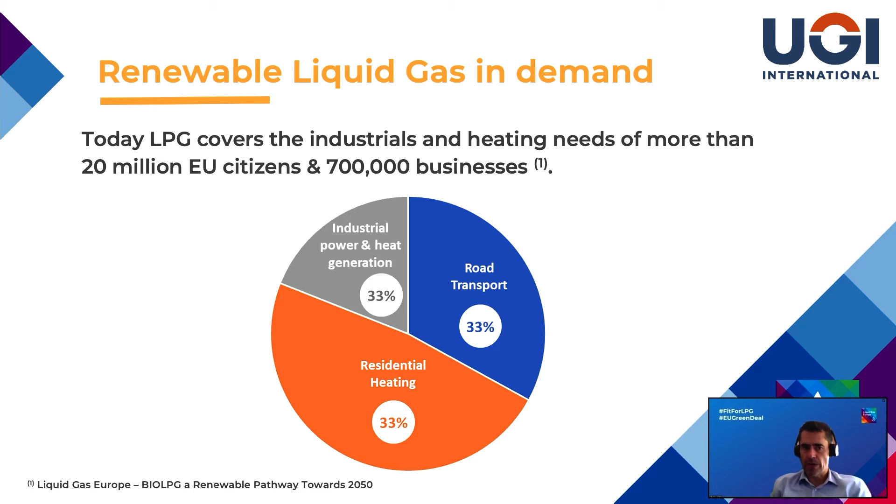In terms of technical pathway, to reach our 2030 goals and beyond, we have developed an innovative roadmap built on a mix of technologies. There is not only one. Some of them are available today and capable of co-producing LPG.

For the next step, we are focusing on in-development technology to produce on-purpose liquid gas. We are also intensifying our focus on research and development and external partnership. Our pathway will be an iterative process where we constantly search for new innovative and efficient ways of producing renewable liquid gas. This is the most appropriate way for us to innovate and make our future sustainable.

The future is a smart combination of technology, partnership, and feedstock availability. As we are targeting carbon neutrality, we have to use what is available annually. It is simply what nature produces over a year and qualified as biomass.

One of the most abundant components in biomass is sugar. This is what photosynthesis produces using water from the soil, CO2 from the atmosphere, and the sun's rays. The fermentation of sugar produces alcohol, and given the limits of the HVO process linked to the ban of palm oil or the limitation of used cooking oil, it's obvious for us to focus our work on the conversion of alcohol into hydrocarbons.

We can use different feedstock, but we target advanced material in the sense of the European regulation, especially RED II and Annex IX. That is to say, essentially, what is not in competition with food or something that will introduce change in land use.

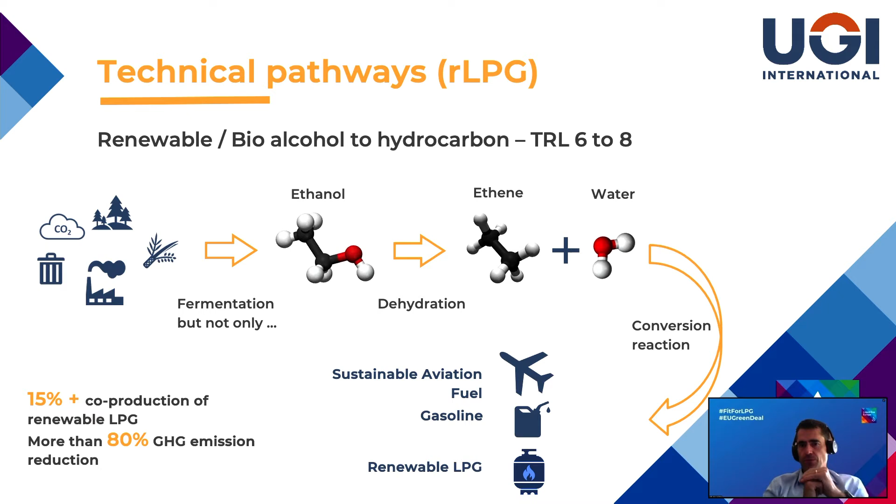Among the other pathways, the most mature one I would like to mention is renewable dimethyl ether, RDME, produced from organic matter. It's a sustainable liquid gas with up to 85% lower greenhouse gas emission compared to fossil alternatives. RDME can be produced from sustainable feedstocks such as waste and residue using gasification and catalytic synthesis. Being a safe, cost-effective, and clean-burning fuel, RDME is a viable and sustainable addition to the energy mix.

RDME is chemically similar to LPG, and in both pure and blended form, RDME can help decarbonization by becoming a sustainable alternative for off-grid energy uses, including heating, cooking, and transport, just like the existing uses of LPG.

Together with industry partners, we announced earlier this year our ambition to promote RDME, and we are investing in the development of 6 production plants within the next 5 years, targeting a total production capacity of 300,000 tons per year in 2027. Our ambition with SHV Energy is to build a joint venture, and this joint venture will bring scale and critical mass to the RDME market by developing opportunities for investment in production capacity.

Moreover, it will promote the use of RDME by driving effort for market acceptance, developing new RDME-based technology to gain traction among users, and supporting the development of infrastructure, regulation, and standards for the safe use of RDME in the off-grid sector. This is really a great step forward where 2 leaders team up to innovate for the benefits of our entire industry.

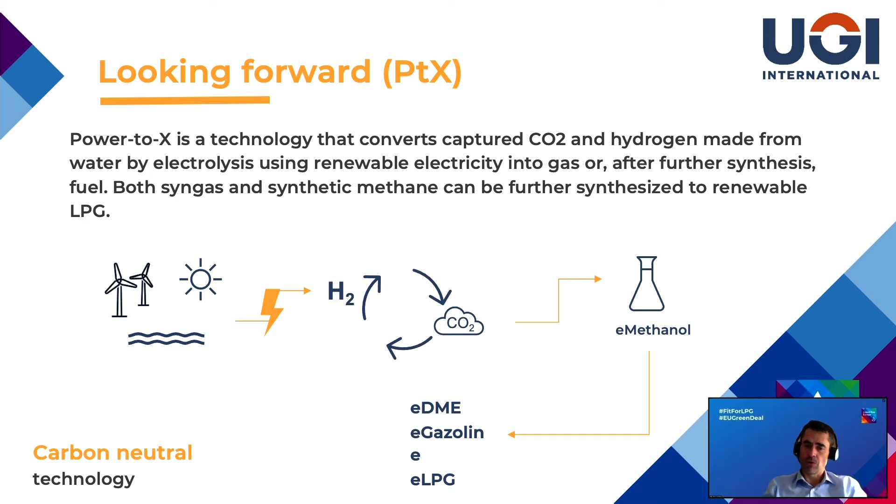What's next? To go further and look at the long term, we certainly have to think about our diversification with less carbonated molecules. The possibilities are multiple, but some of them have a particular fit with our industry DNA.

Let's imagine that we go from 3 and 4 carbon atoms to only 1. We now have a candidate, that is methanol. I mentioned it already. It represents an interest as an intermediate molecule, but also as a final energy.

The green methanol market is expected to grow strongly by 2030 in Europe. Experts predict that 54% of methanol in Europe will be bio-based or renewable by 2030, with a volume of over 500,000 tons per annum. Transport is expected to be the key driver. There is already interest across the whole value chain, with a wide range of players starting to invest, like producers, distributors, car manufacturers, shipping companies, energy companies.

Methanol to gasoline and DME production shows the immediate interest of methanol for industry. And in the longer term, it's being considered as a transportation fuel for fuel cell vehicles, marine transportation, and gas turbine power generation. Let's now substitute the remaining carbon atom by nitrogen.

We now have ammonia. Ammonia is currently used by a vast array of industries: fertilizer, chemical, mining, pulp and paper industry, and others. Green ammonia production is expected to reach 1 million tons per annum by 2030, and 22% of the total ammonia produced annually will be renewable.

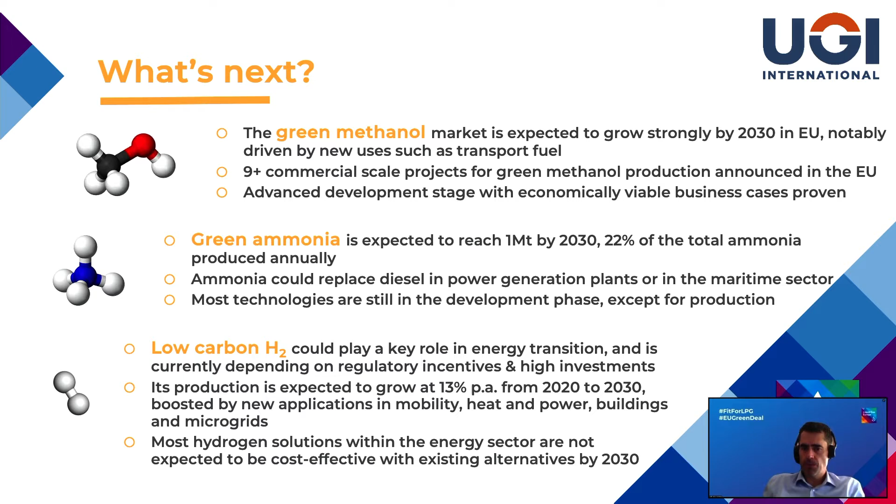And finally, just keep the hydrogen atoms. We now have a molecule that does not contain carbon anymore, and that will not produce greenhouse gas emissions at the exit of the exhaust pipe.

But what about the production of this hydrogen that is not yet completely decarbonized? Today, hydrogen mainly comes from fossil fuels such as natural gas, with an expected annual growth of 13% from 2020 to 2030 in production.

Renewable electricity should represent 20% of the total hydrogen produced in 2030. This will depend mainly on a decrease in the production cost of renewable electricity, but also on the cost of electrolysis, as commercial scale installations are being set up.

Green hydrogen projects are booming in areas where we have regulatory incentives and where renewable energy can be produced at low cost. Mobility is expected to represent nearly 50% of new usage of green hydrogen by 2030, but gas grid, building, and microgrid after 2030 could represent the main growth.

Finally, I would like to open some windows for different areas of innovation. Innovation, as you can see, is on its way. And for the future, there are many other areas where innovation is needed.

Propane and butane production has never been a refiner's primary objective. In our discussions with them, they clearly tell us that they try to reduce its production as much as possible. There is a need for our industry to promote and support the development of on-purpose propane and butane production processes.

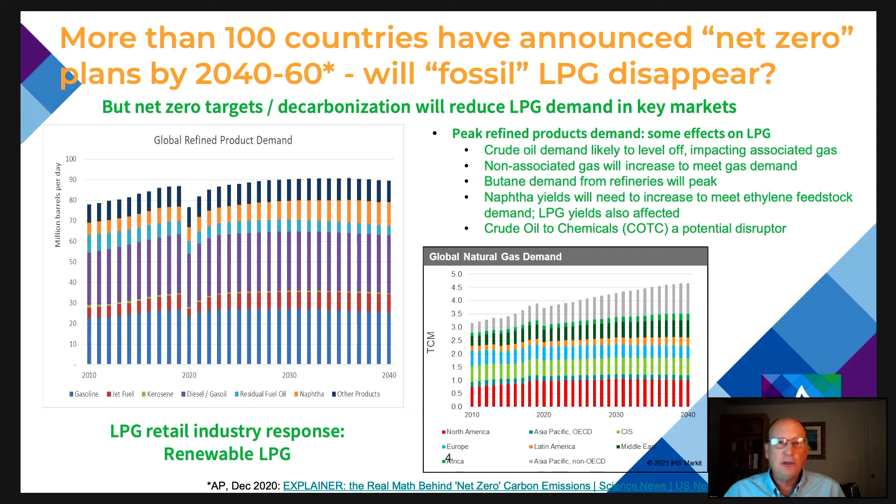Another potential disruptor is the trend toward producing chemicals directly in refineries—traditional refineries switching over for so-called crude oil to chemicals. That could very well produce a whole lot more fossil LPG as well. So we should expect to see large changes in traditional refining and gas production that's going to end up still producing a whole lot of LPG, and we should not see it decrease.

There's a couple of things to point out that are important. One is that you only get propane from the HVO process—you don't get any butane. So anything that's butane-specific from a demand standpoint is not going to be served by this HVO process. The second thing is that renewable diesel is different than biodiesel. Biodiesel is produced from transesterification, which has glycerin or glycerol as a side product, and it doesn't produce any LPG.

Third, different types of oils or lipids can affect the propane yield—the lengths of those side chains, for example, will have an impact on the LPG yield coming out of this. So there's no exact yield to state. Finally, you can also use what's known as tall oils or other fatty acids to feed the HVO process, and that won't produce any propane because they don't have that backbone that comes together. So there are limitations, and you need to watch this when looking at HVO and see what kinds of feedstocks are being used.

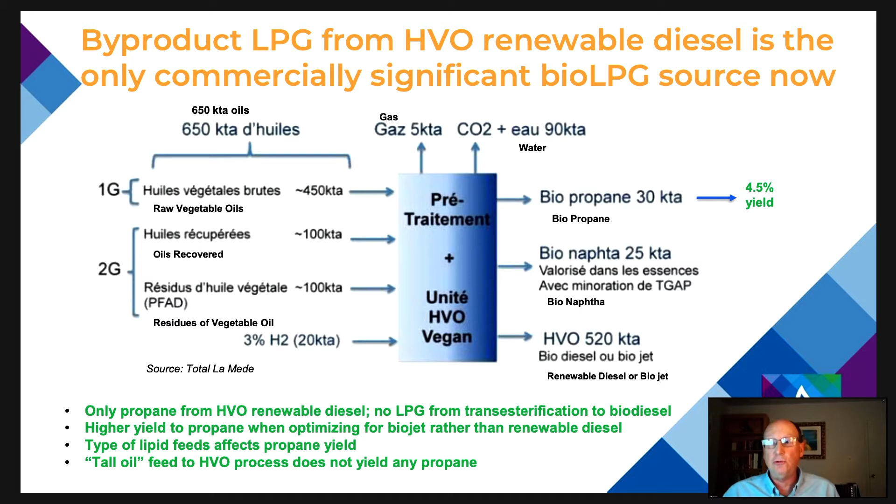If we can go to the next slide—we've seen that there are several renewable LPG pathways that are commonly referred to, and Cedric mentioned all of these. The first one on the left, power to X; biogas conversion in the middle, which is typically going to go through gas to liquids; and on the right-hand side, biomass to liquids. What these have in common is that they go through synthesis gas, or syngas, which is a mixture of carbon monoxide and hydrogen.

They all have their own individual challenges as well. If you look at power to X, Cedric mentioned this—first, where do you get your CO2? The second thing is that it's going to require a lot of hydrogen, and that hydrogen needs to come from sustainable sources. We're going to hear a lot more about hydrogen in one of the speeches ahead, and hopefully they'll talk about the different colors of hydrogen. But if you really want to be sustainable, it needs to be green hydrogen.

If we look at trying to make CO2 turn into other types of fuels, that is effectively thermodynamically uphill, and you're going to need a lot of energy input to bring that to fruition, and that's expensive.

When you look at biogas conversion, biogas is typically a mixture of methane and carbon dioxide, so there's a lot of carbon dioxide involved in that process. There are different types of biogas, and you're going to have to make a separation. It's not as clean as getting a lot of the methane that you might get from the gas grid.

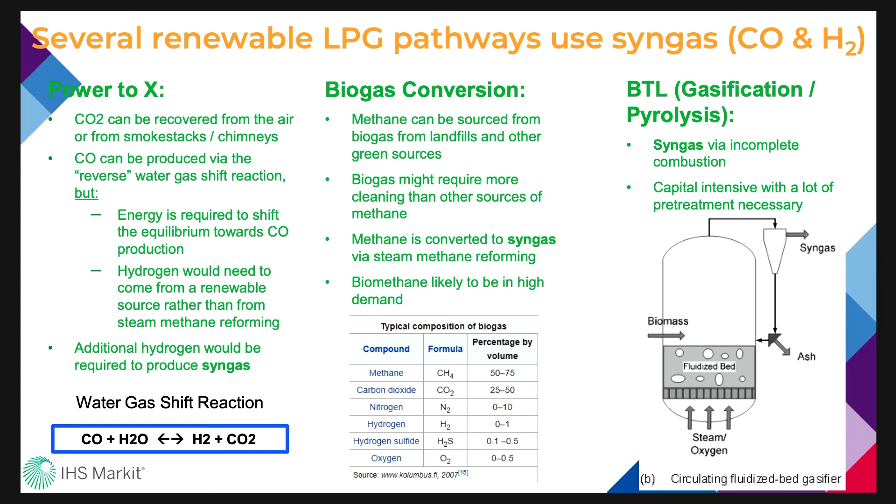So what is the issue with synthesis gas? Let's go to the next slide.

In this next slide you see synthesis gas, and on the left-hand side, what's really amazing about synthesis gas is that you can go to an amazing array of different types of chemicals from it. When you look at the process that goes through alkanes, typically they're optimizing on diesel and gasoline. Indeed, if you look at Sasol and Shell, you're looking at maybe a 1% or less yield typically, because they're trying to emphasize middle distillates, gasoline, things like that.

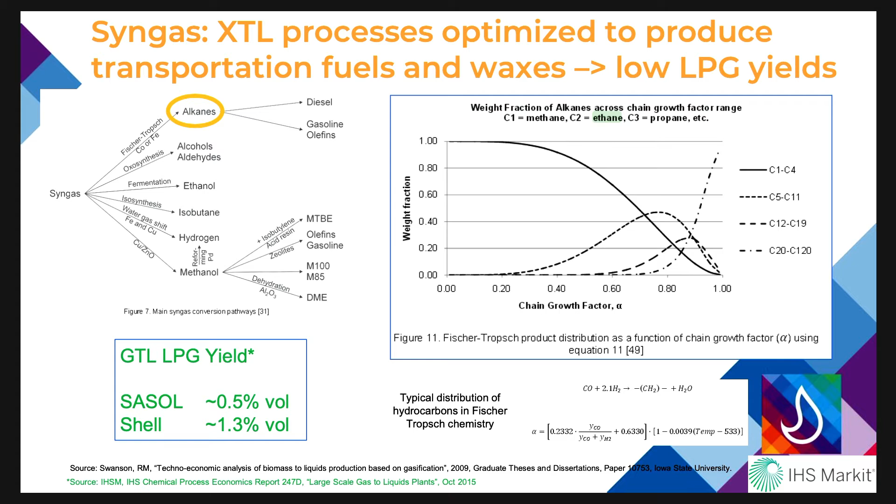Can you shift the optimization? Absolutely, you can change those operating conditions. I won't go into the details of this, but you shouldn't expect them to, and that's really for financial reasons. I'll talk just a little bit more about that on other slides, but anything that goes through synthesis gas is unlikely to produce a high yield of LPG because other products are going to be more cost effective to produce. Next slide, please.

You also heard Cedric talk about production starting with ethanol. I won't go into a lot of detail, but first off, you don't have to start with just ethanol—you can use other types of alcohols for this. But what's important to understand is that, in Cedric's graphic, it goes through ethylene.

So ethylene is also something that people are going to want to produce in sustainable and bio-effective ways. And ethylene traditionally has been more expensive than LPG. So if you're going to go through an alkene like ethylene, it's going to be more valuable than LPG, so it's not going to make a lot of sense to be producing LPG if you have alkenes as an intermediate.

Consequently, there's been a lot of research to optimize the middle part of this, the oligomerization, where you go from ethylene and other alkenes to longer chains, to optimize on those middle distillates and produce very little of the short chains. It doesn't mean you can't do it, but if you do, you're giving up a lot of the value that you potentially could have.

You can see on the bullet on the right-hand side that there are certainly processes out there that can really minimize the amount of LPG that's produced. You should expect that that's the way most of these processes are going to go, and that LPG production is going to be small.

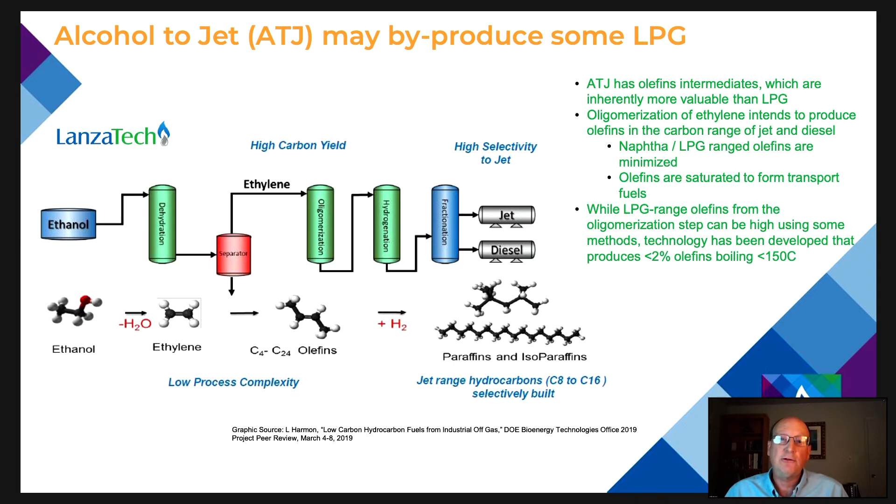Next slide, please. This next slide is from a company called GEVO. It's not an endorsement by IHS, but I just thought it had a good indication in their investor presentation from March.

With the little blue arrows, I'm pointing out a few things. One thing Cedric mentioned is that customers want products to be drop-ins, so they can use existing infrastructure. The second thing is that customers want products at a price near parity with fossil fuels, especially when trying to convert processes over.

So there's a lot of price pressure on these biofuels companies to keep costs low. The last arrow here is that GEVO is trying to share their carbon value to make products more affordable for customers and still eke out a return for their own company. There's a lot of margin pressure on this. You can see here, they build the molecules that capture the most value.

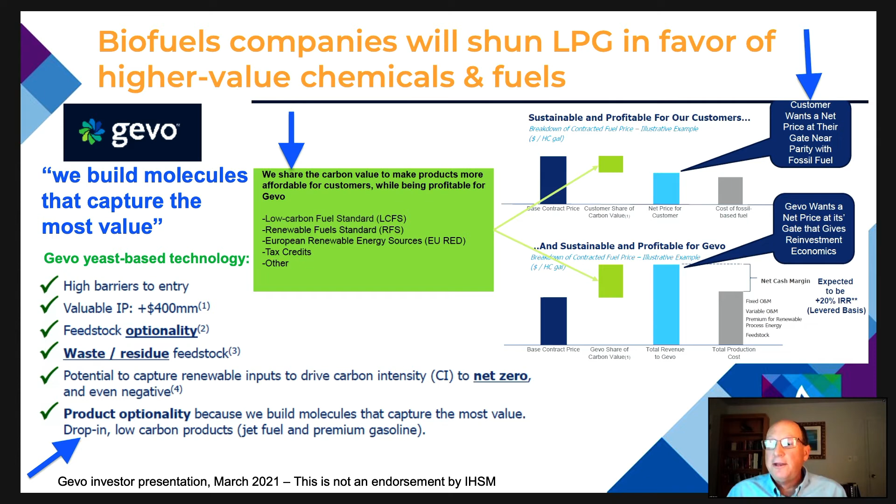Most of the time, that's not going to be LPG. So on the next slide, the implication of this is that an economical, on-purpose renewable LPG process would be quite a disruptive technology. In all the cases we've seen, it's a byproduct, just like fossil LPG is today. And the qualities that make LPG attractive as a petroleum byproduct—cheap and plentiful—make it unattractive to make on purpose. So what are the criteria we need?

You need a bio or sustainable feedstock that's cheaper than the bio LPG being produced, and that cuts out a lot of options, a lot of pathways. The feedstock would need to be in sufficient supply—plentiful enough to avoid triggering a restrictive increase in cost if you start using it at large scale. It needs to make more sense to make bio LPG than to move on to other biochemicals or biofuels, which is a problem with going through any kind of alkene on the pathway to LPG. So that cuts out a lot of different processes.

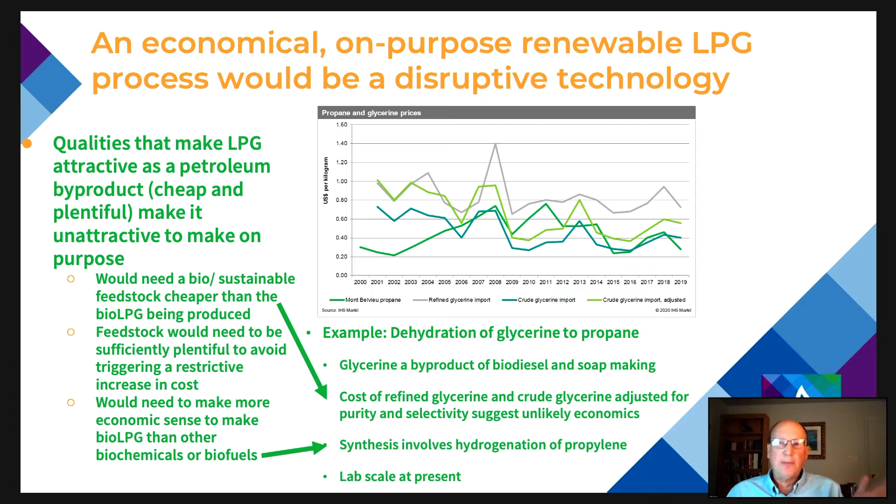I'll skip over the glycerol part of that, and let's just move on to the next slide, in the interest of time.

So what would it take to produce more bio LPG, and is it really worth it? On this graphic, on the left-hand side, we have a simulated Shell gas to liquids barrel. Today, they're not producing much LPG, as I mentioned, in the 1% range. So what are they producing? They're producing naphtha, diesel, and kerosene. As I mentioned, you can shift that equilibrium, but would it make sense to do it?

On the right-hand side, this is just pulled from some wholesale prices from April 2021, and you see why it is that they're producing these products—it's because they're worth twice as much as LPG. That's why they're doing it. And you might say in the future, well, LPG is going to become more expensive, but these other products will too. They're going to become more expensive because they come from biosources and because they're drop-in products that go into existing infrastructure, just like you want to do with LPG.

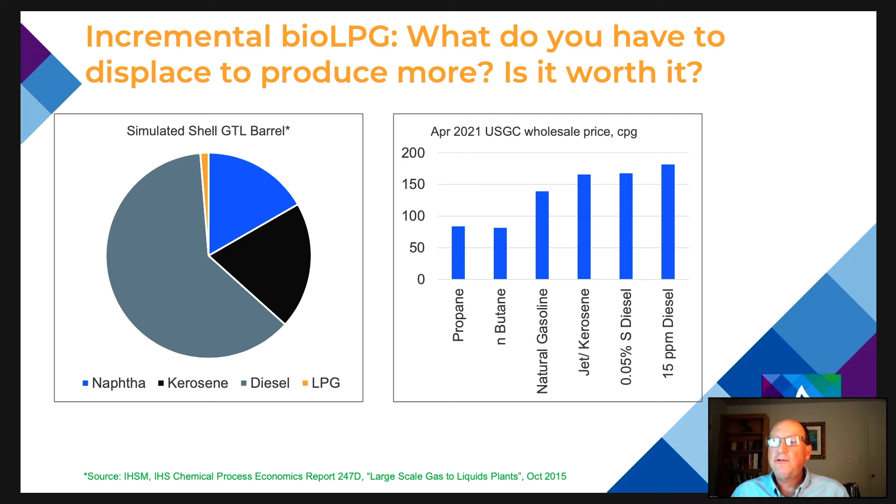So is it likely that LPG is going to outcompete these others? I would say probably not. So what does all this mean for the LPG forecast going forward? Let's take a look. Next slide, please.

Consider that if Europe is not going to use it, and the US is not going to use it, and Northeast Asia is not going to use it, and Brazil's not going to use it, and South Africa and Australia are not going to, where's it going to go?

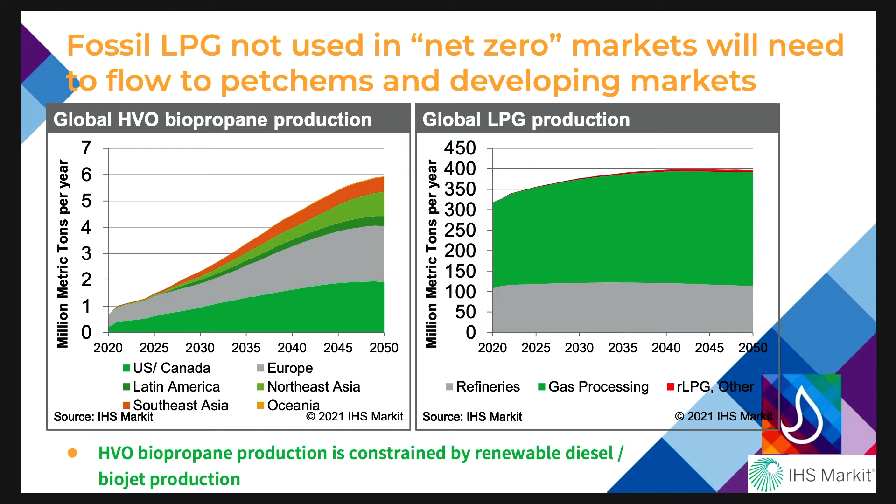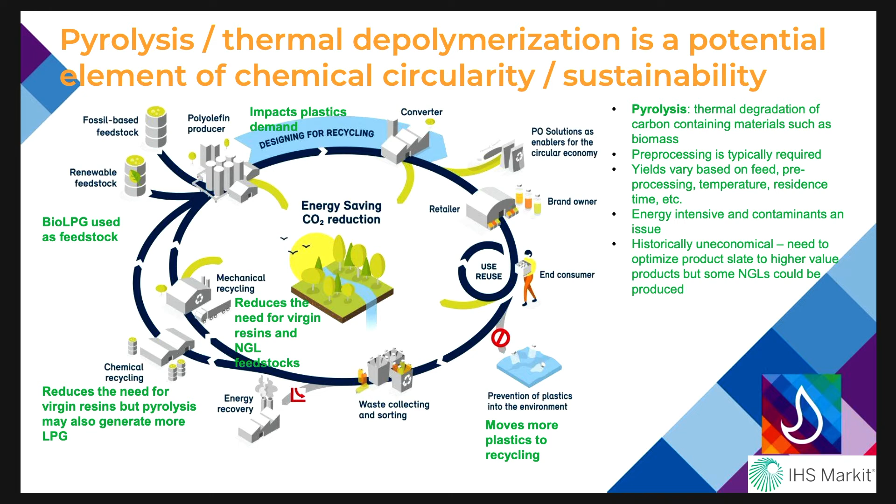One path that I don't really see talked about a lot, because this isn't a chemically oriented audience, is you hear about pyrolysis, which is kind of the gasification of biomaterials, but everybody wants to get rid of waste plastics. Universally, people want to get rid of waste plastics. And there's certainly mechanical recycling, but on the lower left-hand side, you see chemical recycling.

One thing you can do is go through a thermal depolymerization process, which is a form of pyrolysis. You can chemically recycle certain types of plastics. Now, certainly there are some challenges to it. Historically, it's been uneconomical, very energy intensive. Contaminants are an issue, and it takes a lot of pre-processing.

But the thing to consider is that while the target may be to produce monomers, you may also get some side products like LPG. I don't think there's any clear winner yet about which processes and which catalysts are going to be used, but it's very likely that we should see some sustainable LPG come out of this process. So that's something to look forward to, and I think a glimmer of extra hope.

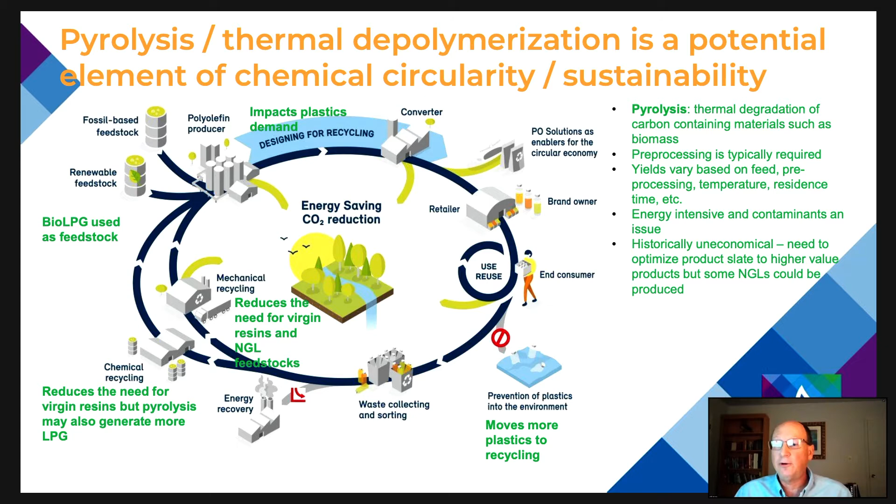Let's go to my last slide, which is just a few closing thoughts. The first thing is, it should be obvious both from what Cedric said and what I said, that with the technologies currently being considered, renewable LPG is really a long way from meeting potential demand, not just here in Europe, but all over the world.

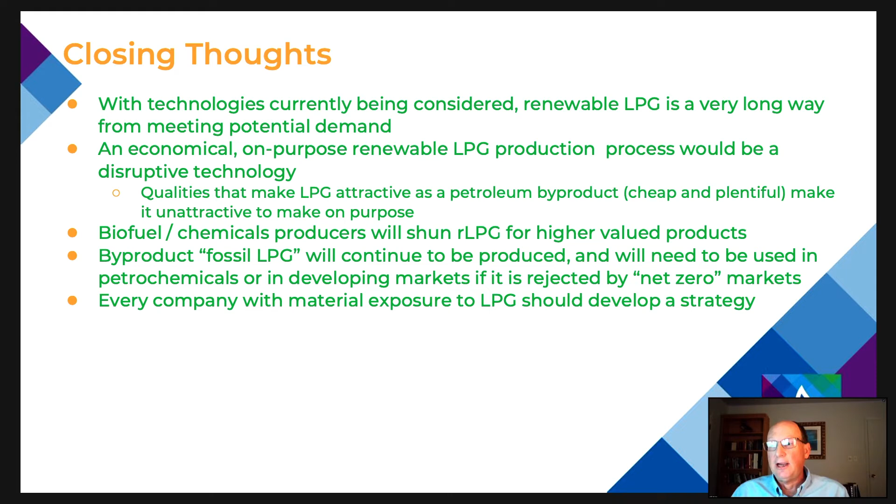Secondly, an economical on-purpose renewable LPG production process would be quite the disruptive technology. The qualities that make LPG attractive as a byproduct make it unattractive to make on purpose, and that's a disadvantage.

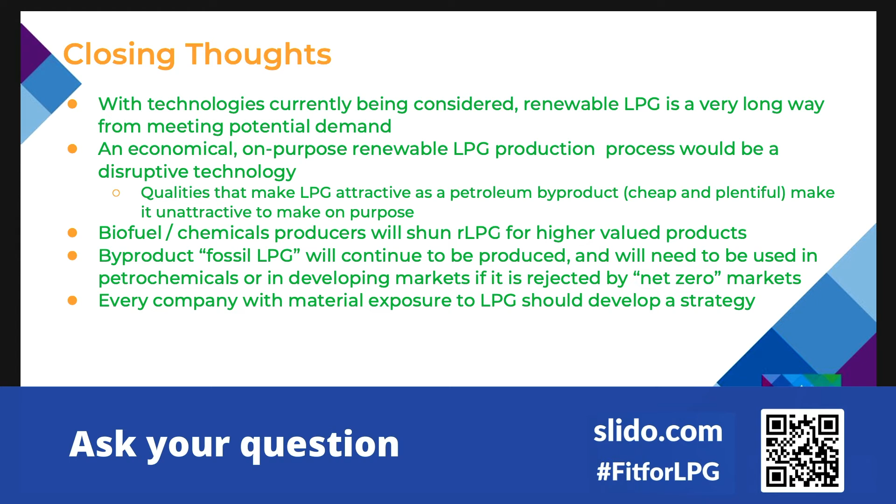Biofuel and chemicals producers are not likely to optimize to LPG because it's a low cost intermediate. They're going to be looking to produce higher valued products. Now, byproduct fossil LPG is going to continue to be produced, and in large quantities.

We're going to have to find some way to use it, even if it's not in Europe or other markets that have committed to net zero. There's a big opportunity there. Somebody's going to have to deal with that, and it should be an opportunity for retail companies because they already have the infrastructure and the know-how about how to deal with it.

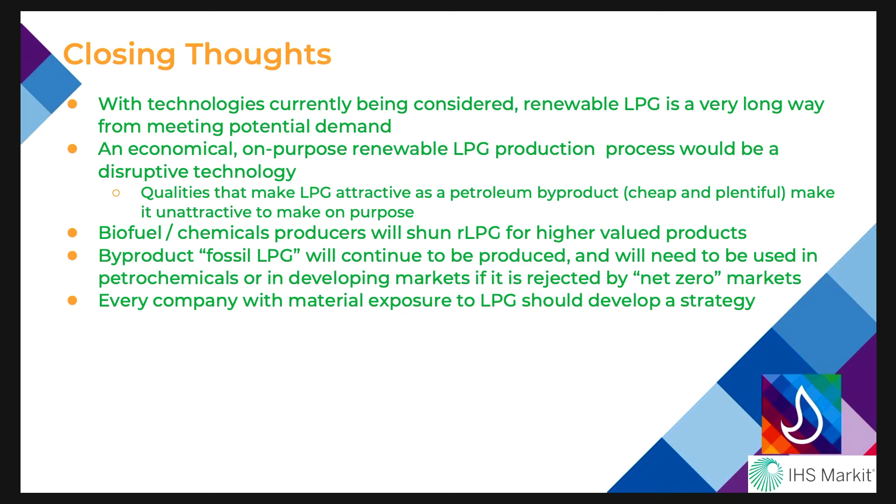I'll say every company with material exposure to LPG should be developing a strategy right now, particularly if you're a small retailer, you need to really understand where you're going to get your supply. So I will leave you with that, and I really appreciate the opportunity to be here.

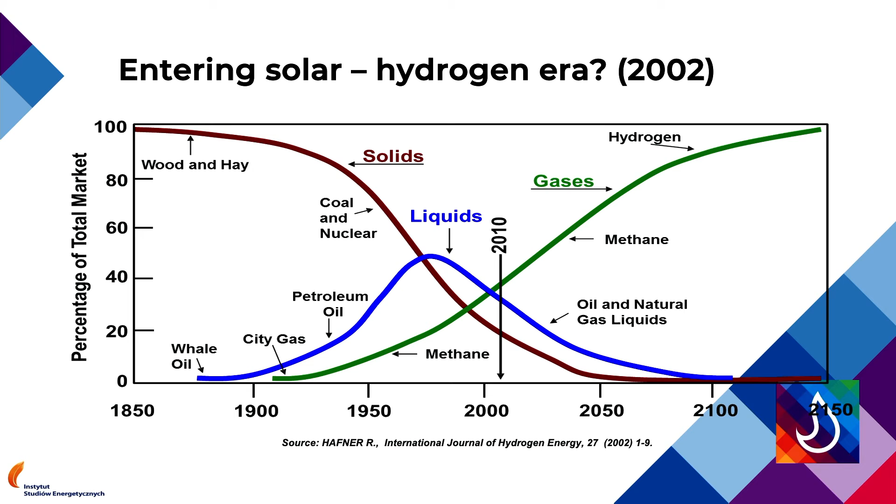It's worth underlining that part of these natural gas liquids from the upstream is today mainly used as raw material for petrochemistry - not only for transport, but for polypropylene and polyethylene production.

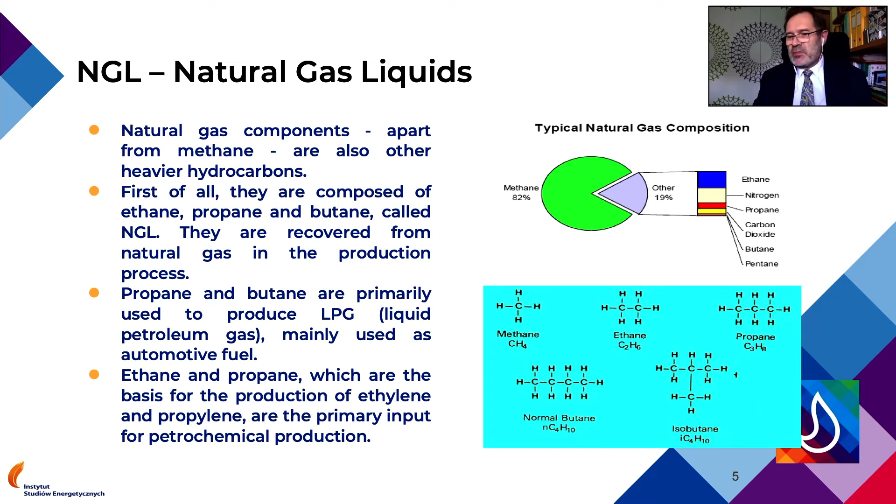This is the topic for the next 10-15 years, because we should remember that in Europe we have refineries and LPG as part of production, but there are also many steam crackers - huge installations where we can utilize raw material like propane, converting it to propylene and then directly to polypropylene. This is not a source raw material for transportation.

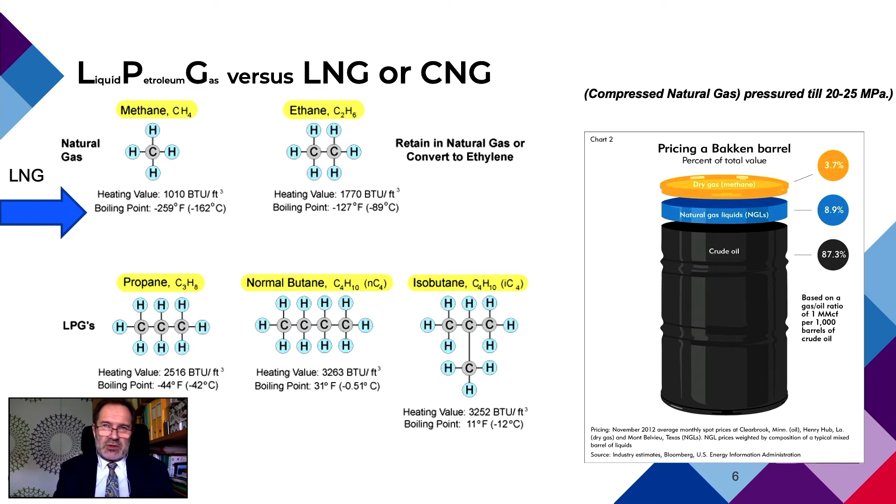I'm expecting this to be the source of energy in the future.

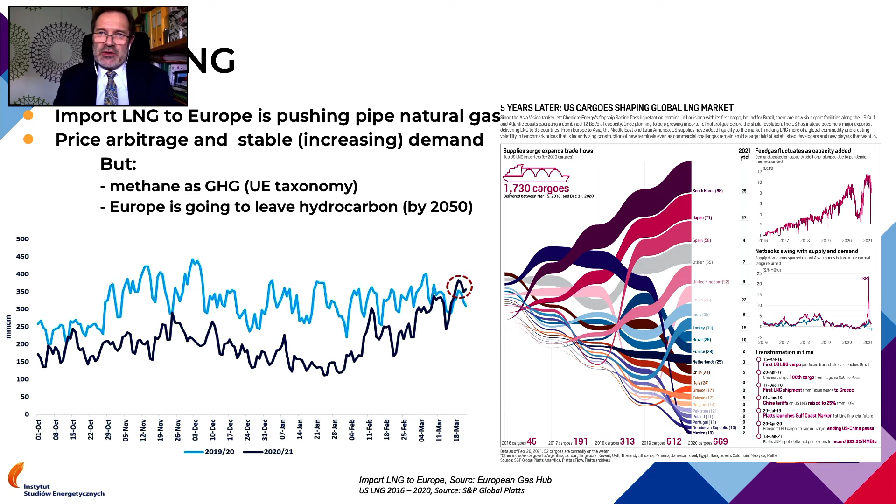On the next slide, I'm showing LNG and the product which today... I'm using this word 'push', but we can say our expectation 10, 15 years ago in Europe was that the main infrastructure for natural gas was a pipeline. For refinery products like diesel and petrol, pipeline seemed to be the best and cheapest infrastructure we could utilize. Today, when we've got LNG as a commodity, simply a commodity like banana or gold, we understand that not only infrastructure, but also how you prepare your product, is the key element of the industry.

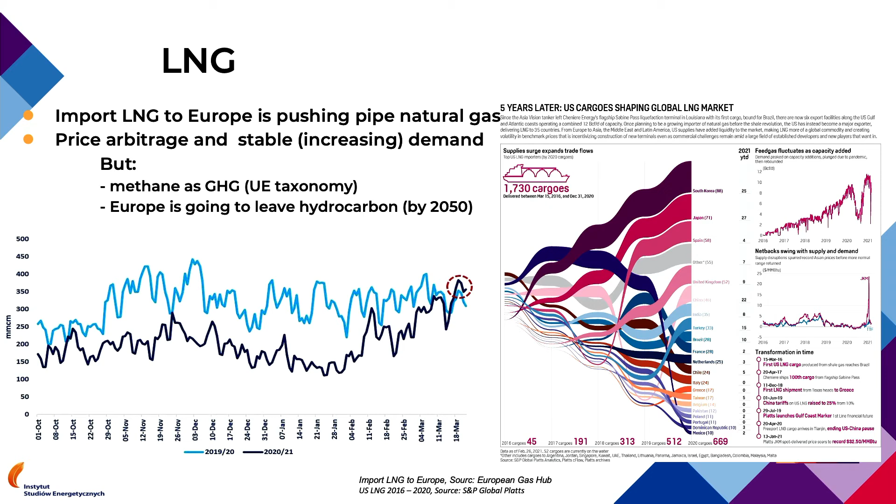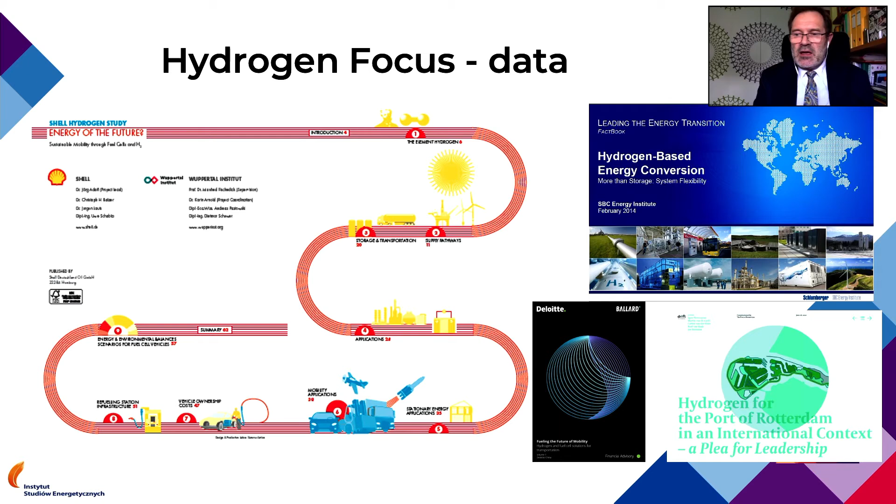It means we understand what hydrogen is, we've got the knowledge, resources, plenty of documents and books. On the next slide, we understand what hydrogen is and how we can compare it to other resources like helium, or as I mentioned before, propane or butane. Such understanding we've got. The only thing we don't have on Earth is proper, efficient technology for how to obtain this pure, so-called green hydrogen without CO2 emissions efficiently. The main message I'd like to share is that as mankind, as human beings, with proper technology and hydrogen properly prepared, we are thinking about this source, but we've got a problem with how to obtain it in an efficient and proper way.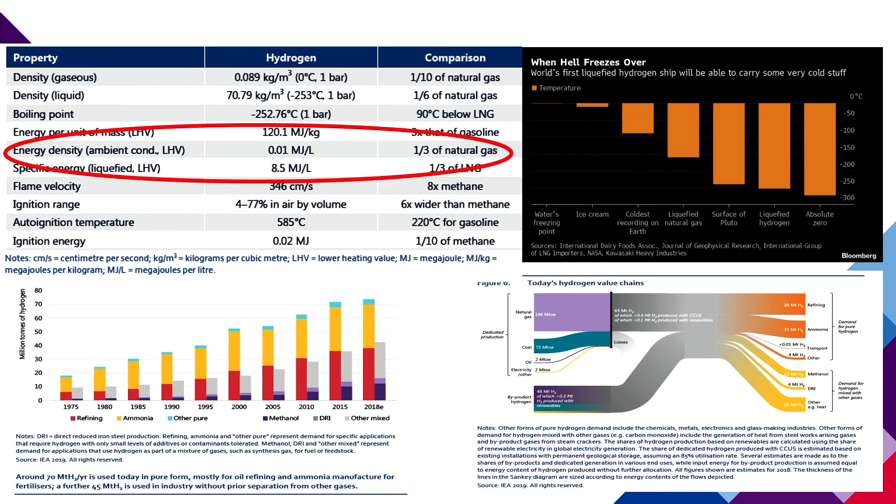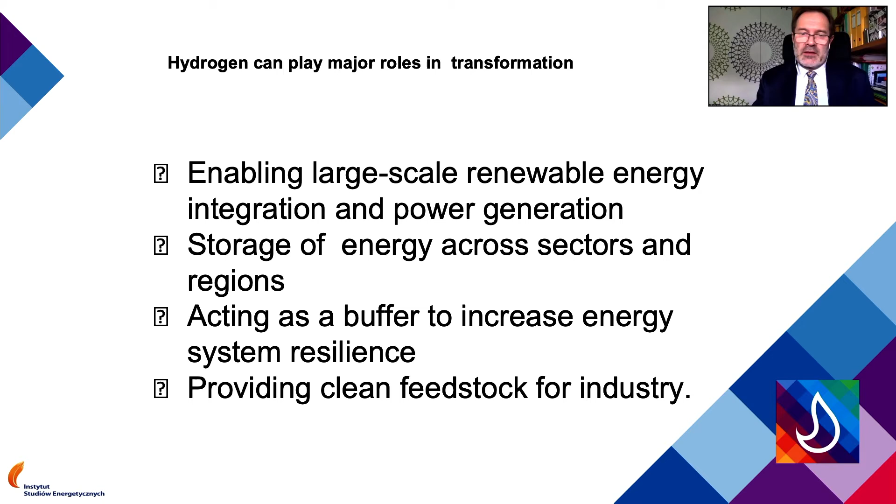On the next slide, a few words on why I am convinced that hydrogen can play a major role in transformation, because of enabling large-scale renewable energy integration and power generation. For sure, this is a possibility for storage of energy. From my perspective and knowledge, graphene could be a source where we can store hydrogen for our cars. It could and should be a very clean feedstock for industry, for petrochemistry, for heavy chemistry, where we've got fertilizer production, for example.

Today, the problem is that the cost of production of this green, without CO2 emissions, hydrogen is too high. For example, when we compare this with the cost of CO2 emission, the price should be more than 300 euro per ton to find it viable.

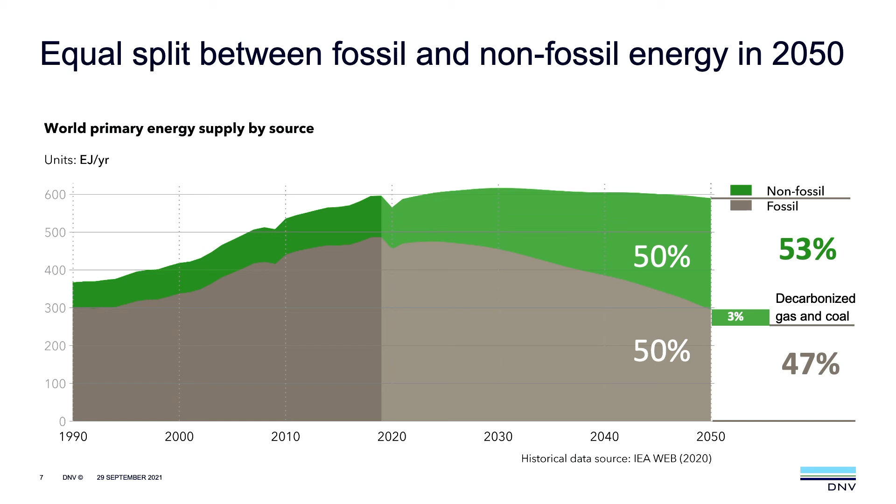This is partly due to a slow recovery in aviation and also to increasing trends towards electrification of the automotive sector. This is already starting in Europe, starting in North America and in China. So we expect this to accelerate.

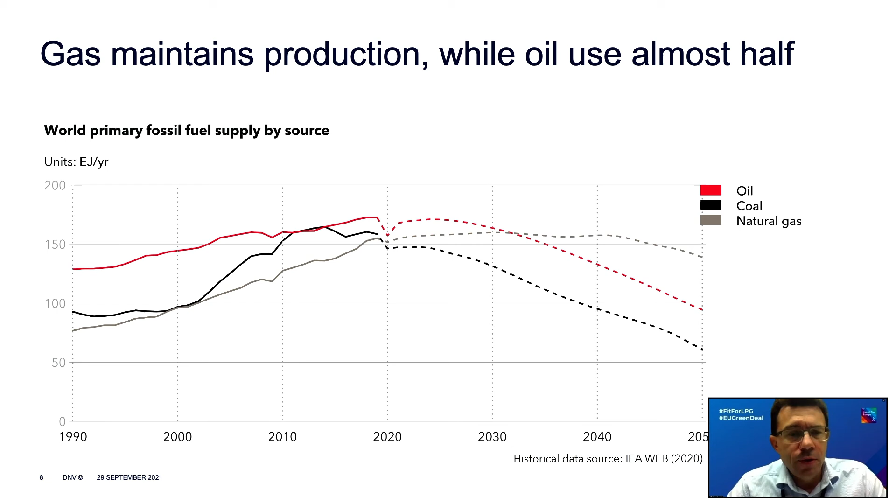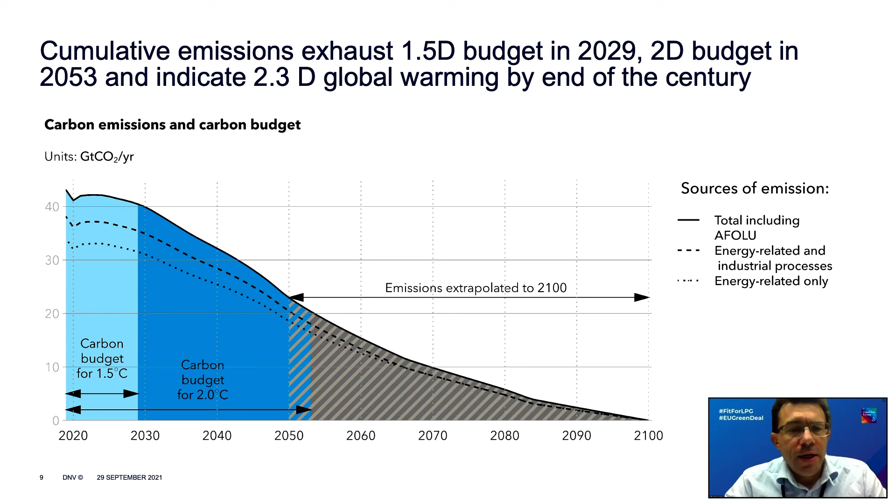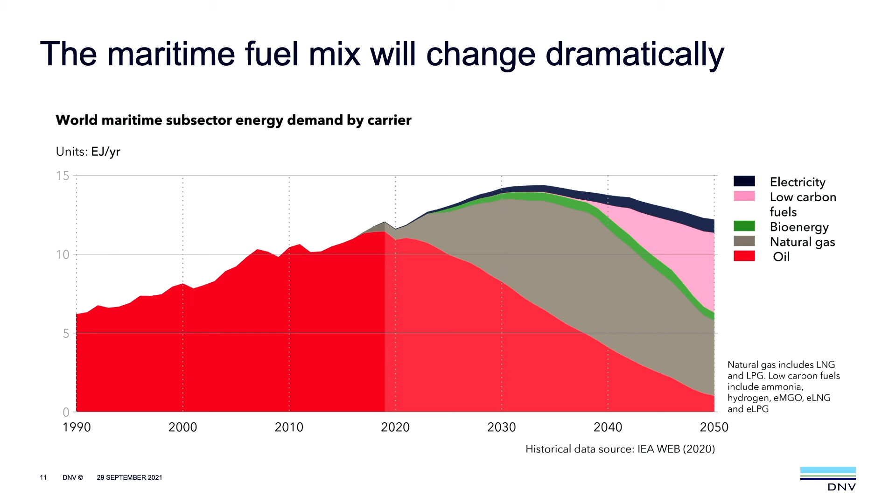We also see the green area, the introduction of biofuels to comply with certain emission requirements. The use of electricity at the very top is quite small, mainly for shore power and very small vessels running on batteries. But in the mid-2030s, we see the potential for introduction of what we call low-carbon fuels - that can be clean ammonia, clean hydrogen, or any type of e-fuels, any type of renewable hydrocarbons, including MGO, LNG, LPG, and methanol. That brings us to the question of what is the best fuel option.

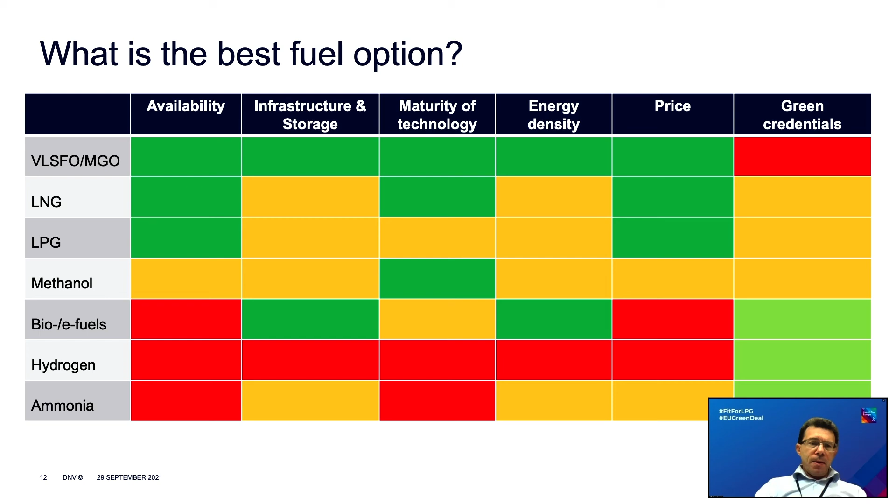I would like to show now some statistics from the market. If we look at new building orders, in 2019 only 6% of the vessels in the order book were with alternative fuels, and actually half of them were with batteries - that's very small vessels. Then there was another roughly 3% LNG. LPG was just starting. If we look at the 2021 order book - numbers before the summer - all alternative fuels are growing, in particular LNG, LPG, and methanol.

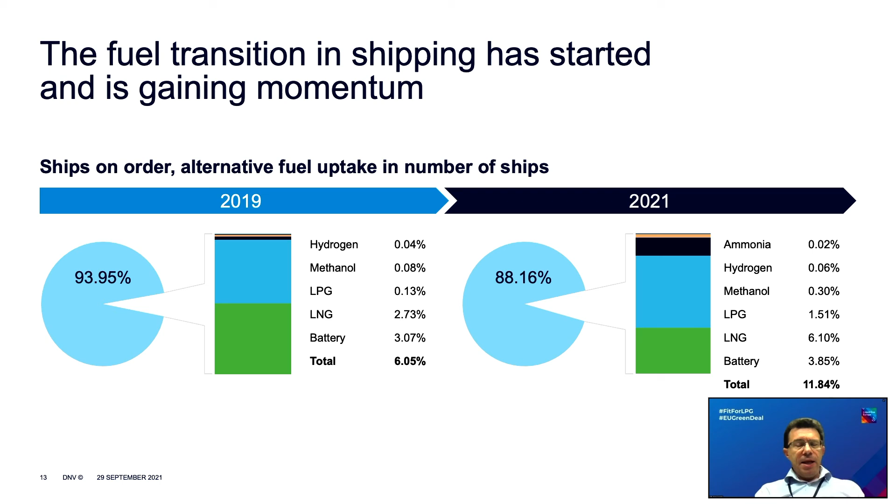In the next slide, I'm taking the isolated order books of 2020 and 2021 only, looking at the top on number of vessels and at the bottom on gross ton of these vessels. This gives us an idea of the size and fuel consumption of these vessels. We see that already in 2020, we had 6% of vessels ordered with LNG, 1% with LPG. But if you look at the size of these vessels, it was quite bigger in terms of gross ton - 20% LNG, 3% LPG. That is a sign that these are big vessels with relatively high fuel consumption. So these are the vessels that were ordered last year.

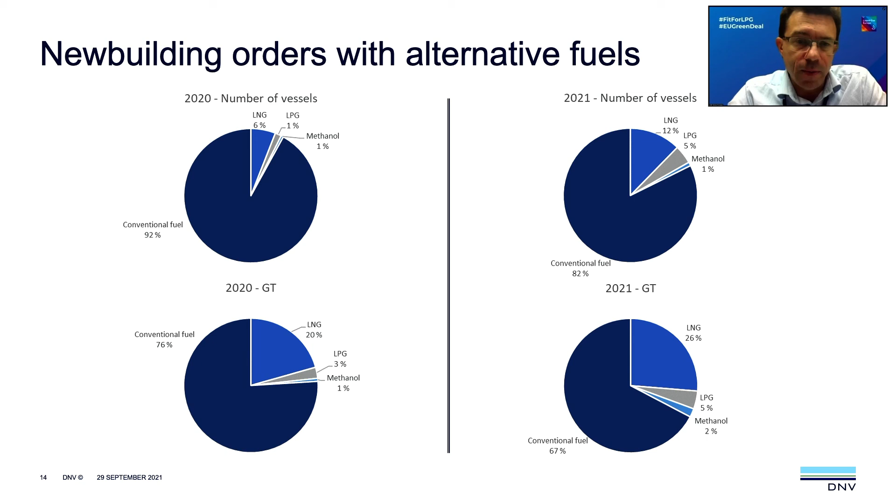This year - updated 2 weeks ago - these numbers are growing quite significantly. We see LNG, LPG, and also methanol growing. LPG, for now, is only going to LPG carriers - 100% actually of LPG carriers ordered today are with LPG as fuel. It's a very interesting development. And we already have 10 vessels that have been retrofitted to run on LPG.

I would now like to spend the last few minutes talking about the requirements shipping will have to meet and what will be the role of different fuels. It's not any longer only regulations coming from the International Maritime Organization that shipping will have to meet. We also have regional regulations like the European Union is introducing, but also expectations from cargo owners and charterers - they have their own environmental requirements. And also we have many green financing products. We have banks assessing the environmental performance of their investment portfolio in shipping, and they have increasingly stricter requirements. So now there are requirements coming from all stakeholders, and they're actually going faster than the IMO.

In the next slide, we can see a typical scenario where you could have minimum compliance. This is the line you can see on the upper right.

This is a minimum compliance scenario when it comes to carbon emission requirements, or you can have a more aggressive greenhouse gas reduction strategy. You can see here how different fuels can help you and how far they can help you into the future. MF here stands for monofuel - a conventional vessel that can take you, in the best case, to the mid-2030s. With LPG you go maybe to 2040, and LNG a little bit further to the early 2040s. Eventually you may be able to run on clean ammonia or clean methanol, or replace LPG, LNG, even oil with their low carbon equivalents if these products become available. That would allow these vessels to run without any modifications, just replace their fossil fuel with a renewable fuel and keep running with low carbon emissions.

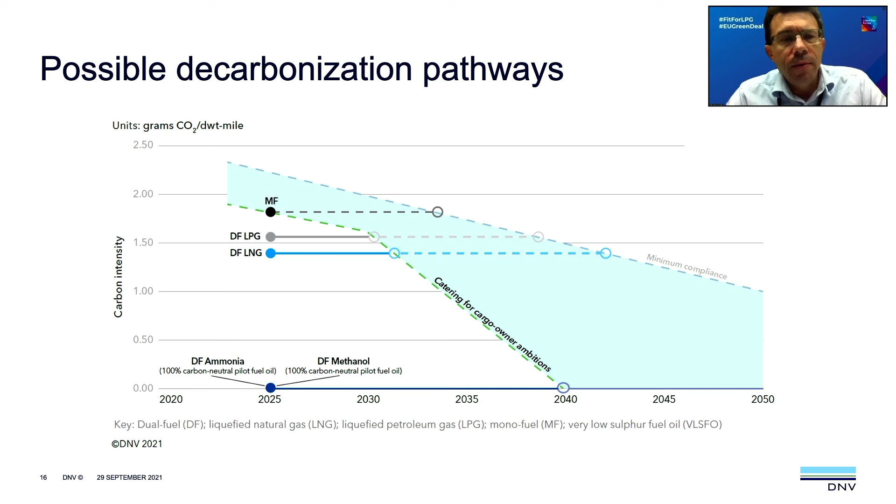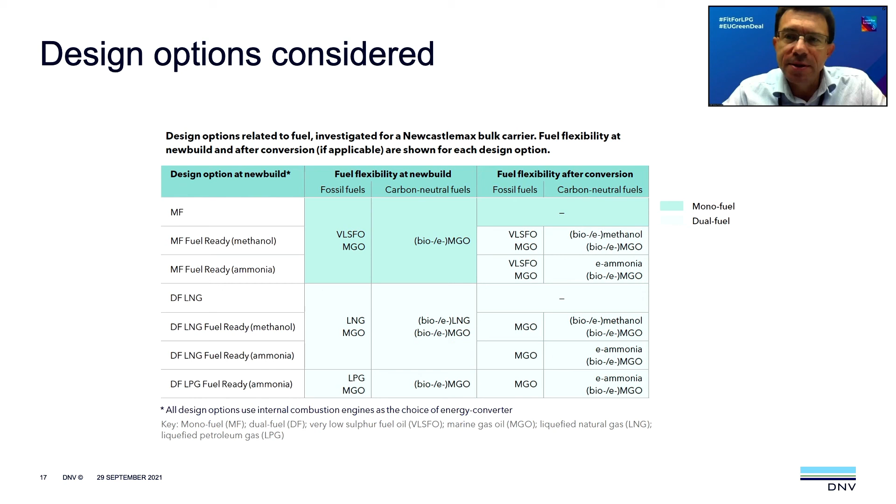As shown in the next slide, we are looking at the technical requirements for building a vessel that is flexible enough to be converted to run on another fuel. Ammonia engines are not available today - they're expected to be commercially available by 2024, and engine makers are working on that. We're looking at how you can build a vessel that could be converted later to ammonia, and there are certain requirements there. Whether you start from a conventional design, an LNG design, or an LPG design, there might be many different requirements. LPG to ammonia is actually the easiest way from a technical point of view, and we know that some LPG carriers today are already interested in later being converted to run on ammonia.

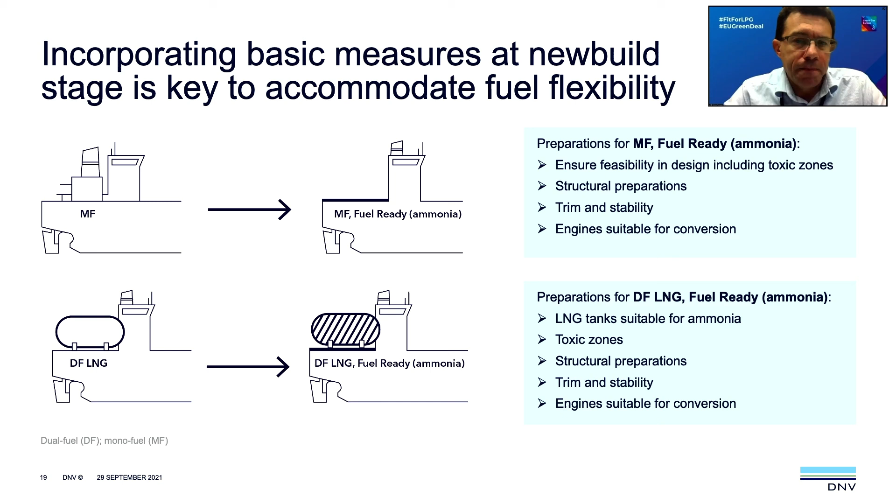I would like to close this presentation with just a very quick overview of LPG as a marine fuel. It can offer greenhouse gas reductions of roughly 15% compared to fuel oil. The propulsion engines are already available - the first vessel was converted a year ago, now there are 10 vessels converted, and we have some new buildings that will be in operation soon. It's lower investment cost compared to LNG, there is global availability of LPG, and it's a standard choice for LPG carriers today. It is maybe the most suitable technology for an ammonia-ready design, which is something we see at least in the LPG carrier segment today. We start seeing interest from other segments on LPG as fuel. I think current LPG prices do not help to defend the business case, but moving forward, that could be one of the many solutions that shipping will need as a fuel.

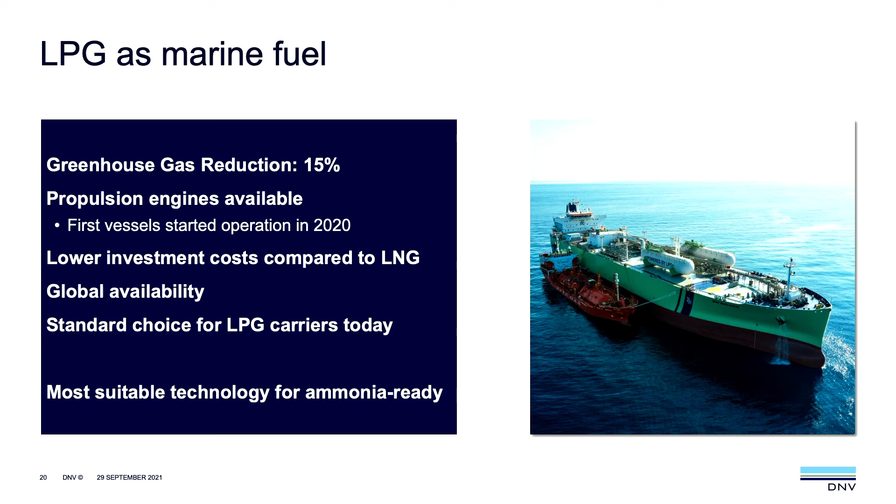Christos, thank you. I will be beaten up by Ava for failing miserably to keep everyone to time. This was the last thing I had to say. Okay, thank you. But it will be worth the pain because it's been absolutely tremendous from all 4 of you, and thank you for that.

We have many questions. Again, I'll apologise to Paul Westerman. I'll put one of his questions, just one, which says - and it's for yourself, Christos, it's a very good question actually - he says, well, I can actually put it up. There you go. He says: with the view that carbon will go up by 3 times in Europe, what's your view on GDP for Europe with that type of cost pressure happening within the European arena?

The impact on GDP - yeah, just a view, that's not an easy one. I would like to have the opportunity to look at our detailed report and what our projections are saying there. But in general, we expect GDP to grow globally. There are regional differences - I think it's growing for Europe as well. Obviously, high energy prices can have an impact on this.

I think it remains to be seen a little bit how we handle the energy transition. What is going to be the cost, because now we have quite high carbon prices that make coal less attractive and natural gas more attractive in a way, but this is putting a lot of pressure on using natural gas, and this is pushing prices up again. So, sure.